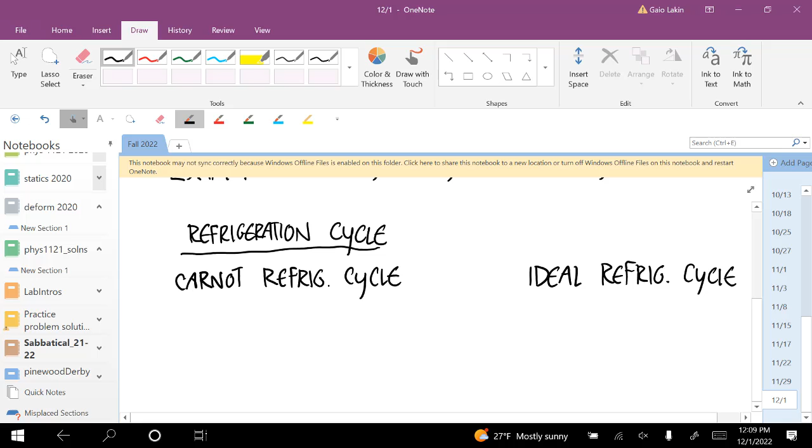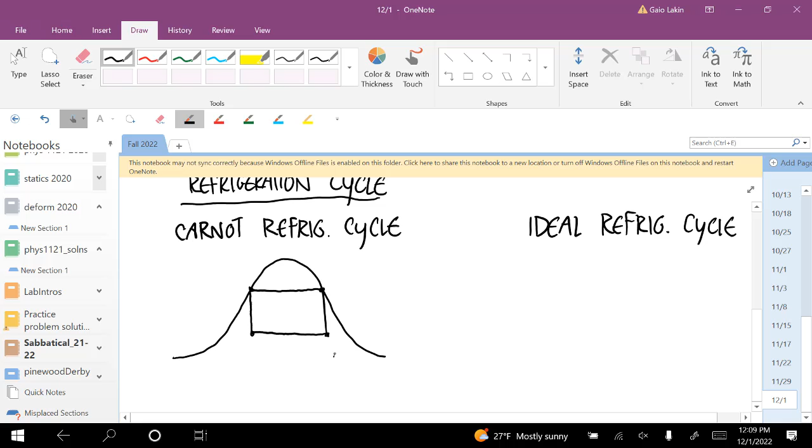So the last thing we're going to talk about is the refrigeration cycle. And we are going to talk about a Carnot refrigeration cycle briefly, and an ideal, what we'll call the ideal refrigeration cycle. The Carnot refrigeration cycle looks like this. Since a refrigeration cycle is an engine in reverse, the states go in the reverse order. So 1, 2, 3, 4, like that.

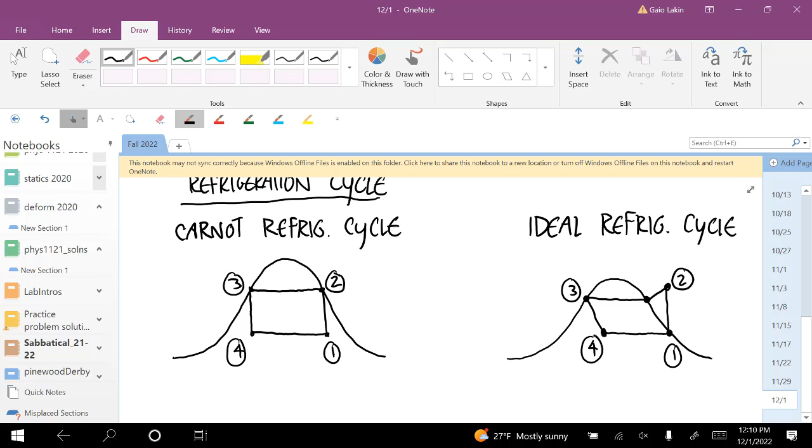And the ideal refrigeration cycle, I'll talk about why we have to make the changes from the Carnot cycle to this. So there's state 1, state 2, state 3, state 4. These are going around counterclockwise. Okay, so I'm going to start with the Carnot cycle.

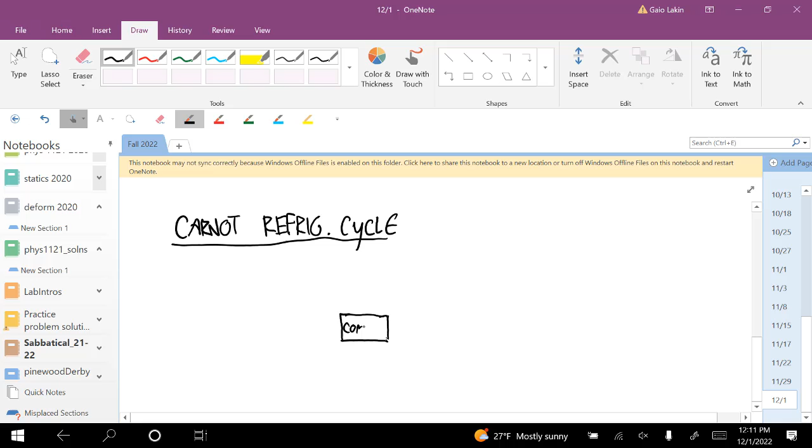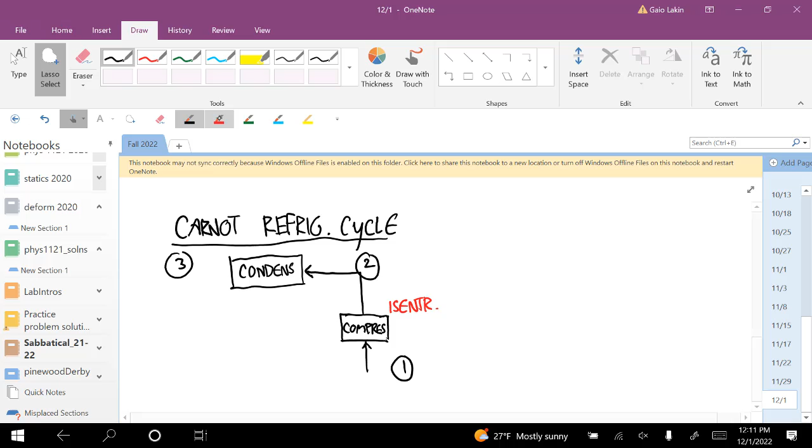And it looks like this. You have a compressor going from state 1 to state 2, and this is isentropic. Then you have a condenser going from state 2 to state 3, and that condenser is isobaric, just like it was for the Rankine power cycle.

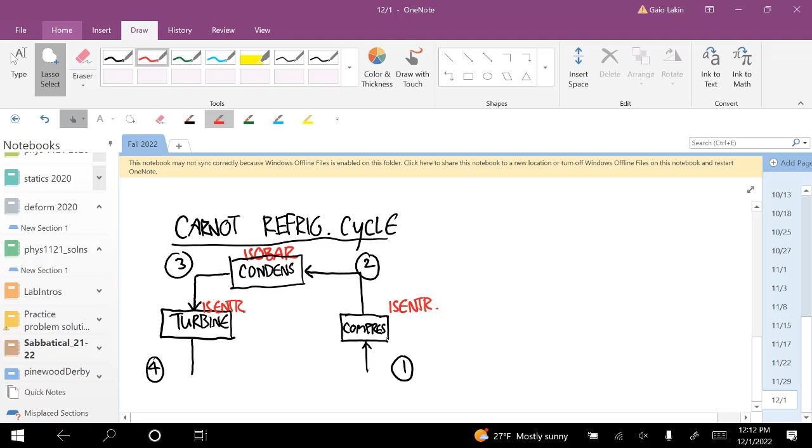And then you have an isentropic turbine going from state 3 to state 4. And then you have an evaporator going from state 4 to state 1, and this is isobaric.

Marshall! We missed you on Tuesday. We were just talking about how much we missed you. Good. Thank you. Oh, it sucked to miss class on Tuesday. I had to correct my sleep schedule from Thanksgiving weekend. Oh, yeah.

And so if you go 4, 3, 2, 1, you can see that this is an engine where that turbine provides work, and the compressor requires work. And let's, I guess, talk about what goes where with this.

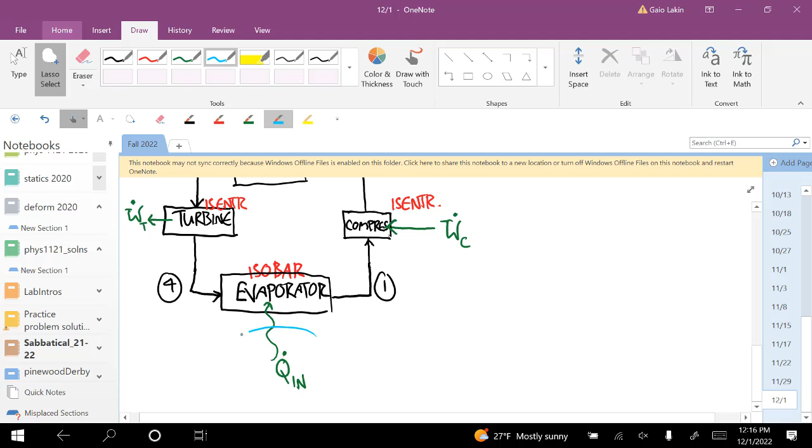In our case, we're doing it in order 1, 2, 3, 4, and it's providing refrigeration. So how does it work? I mentioned this just in passing once before, but all refrigeration cycles are based on this one idea: the Q in is coming from the reservoir. Let's call this the cold reservoir. The trick is, how do you get heat to come in from the cold place and go out at the hot place? That's the goal of a refrigeration cycle.

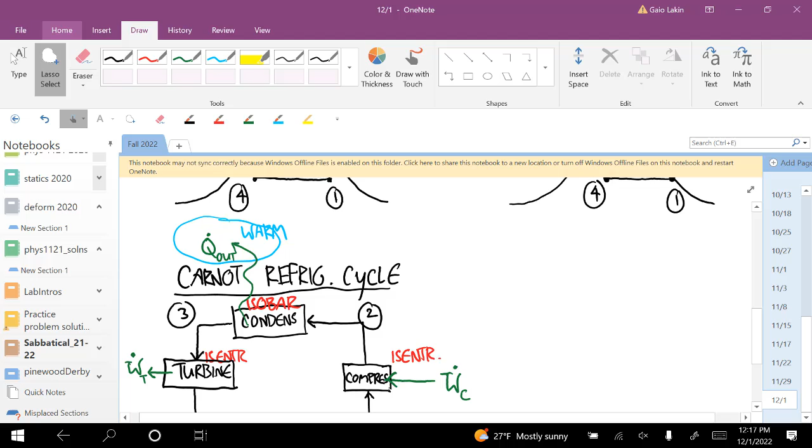This one up here is warm, that's just the surroundings. The trick to doing it is this compressor. You know that if you compress a gas adiabatically, there's no heat transfer. As you compress it, the temperature and pressure go up. So if your working fluid goes into this compressor, the temperature goes up. You compress it enough that the temperature is higher than the surroundings. Then you can get energy to be rejected through heat to the surroundings, and you've removed energy from your working fluid.

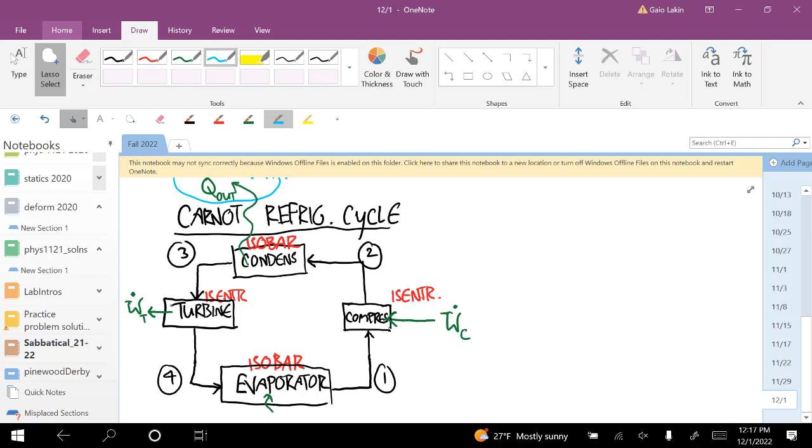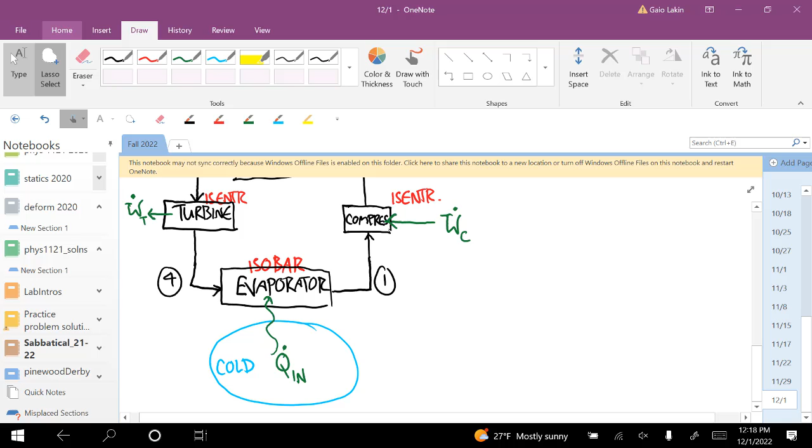Now you go back through the rest of the system, let the temperature and pressure go down again, enough that the temperature of the working fluid is now lower than the inside of the cold reservoir that you're trying to cool down. Now heat can transfer from the cold reservoir to your working fluid. So without adding energy to your working fluid, you can get heat transfer from the cold and drop that energy off at the hot. That's how a refrigeration cycle works.

One more thing about this. Did you know your refrigerator has a turbine in it to produce work? No, because it doesn't. But this is a Carnot cycle, so that turbine is in there conceptually — it's a Carnot engine if you go in reverse. We'll see that for practical reasons, you don't use a turbine, you just use a throttling device to change the temperature and pressure. That will be replaced when we go to the ideal cycle.

And on a temperature-entropy diagram, it looks like this. There's state 1, 2, 3, 4. So this is going in this direction now.

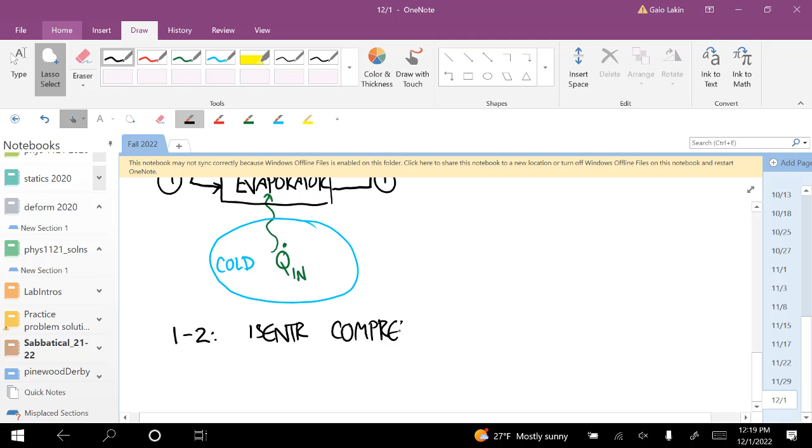Okay, so let's talk about the steps individually. State 1 to 2 is an isentropic compression. The reason we need this is to increase the temperature and pressure — not T over P, T and P. This requires work, W sub C, to go into the working fluid.

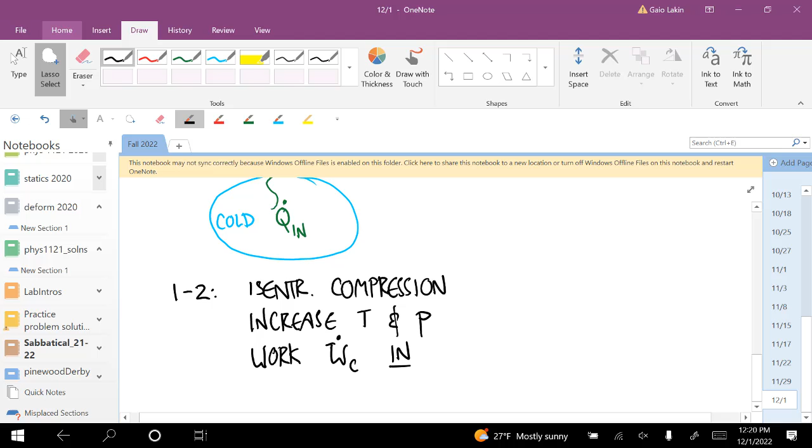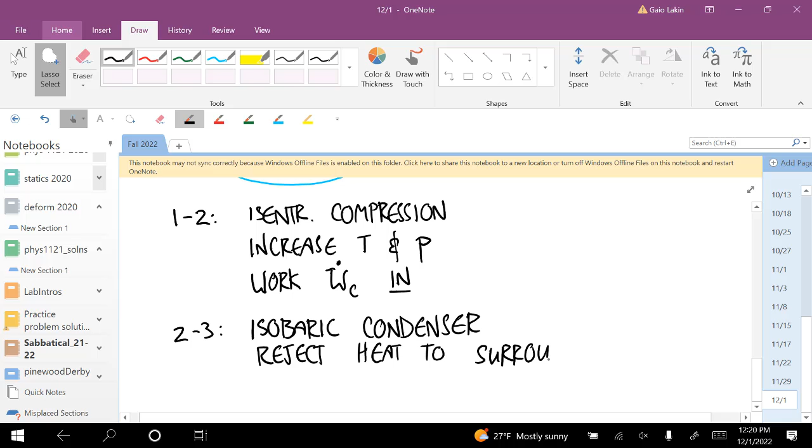Then from state 2 to 3, we have an isobaric condenser. The purpose of this is to reject heat to the surroundings, and that heat we're rejecting is Q out, Q dot out. A condenser is always giving away heat — that's how it goes from a vapor or a mix to a liquid.

And then state 3 to 4 is an isentropic turbine. This produces work, W dot sub T, and it also lowers the temperature, reduces the temperature and pressure.

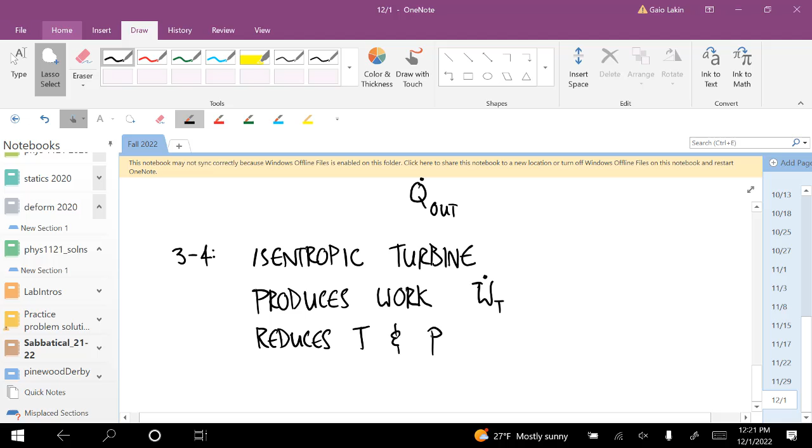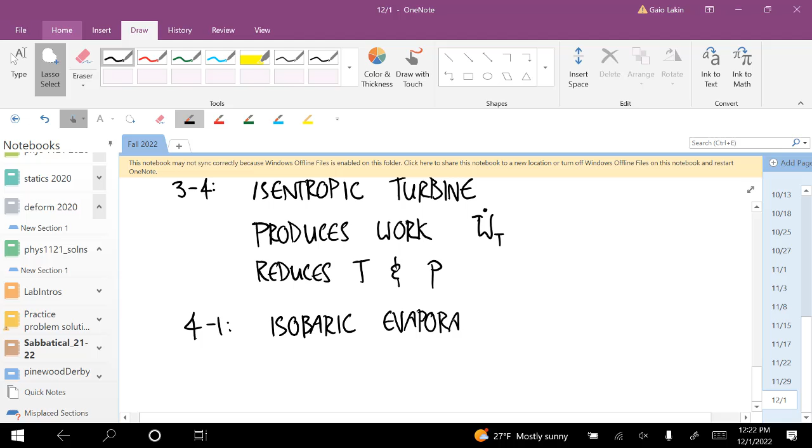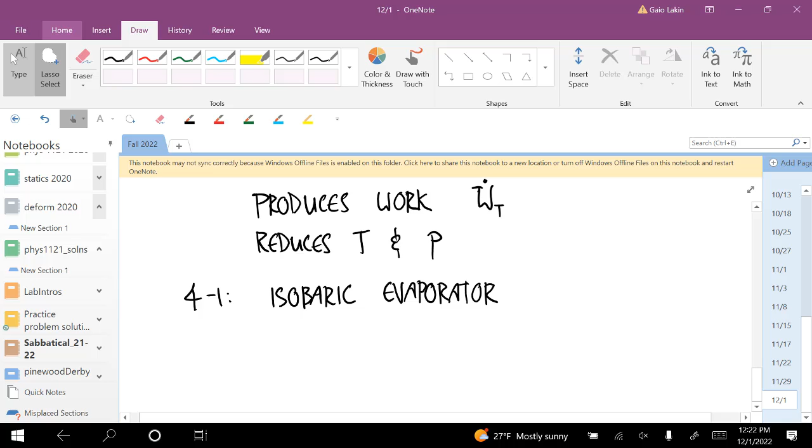And then the last process is 4 to 1, the isobaric evaporator. This takes the place of what was our boiler in a Rankine cycle. Any evaporator, in order to turn a liquid into a vapor, needs to bring heat into the working fluid. So that's what's happening here — heat comes in. So Q dot in, from the cold reservoir, or the cold region, let's call it — it's not a reservoir because you're trying to affect the temperature of that region.

Okay, how do you evaluate the performance of something like this? Well, this is a fully reversible cycle, so this is a maximum efficiency refrigeration cycle. The maximum performance would be defined as the heat that you bring into the system — that's what you're trying to accomplish, getting heat into the working fluid — divided by the net work done to make that happen. So this is Q dot in divided by W dot at the compressor minus W dot at the turbine. That's because the turbine is doing work for you. It would be cool if it was practical to have a turbine that generated a little energy as this all happened, but we'll talk about why that's not practical. And we can rewrite this.

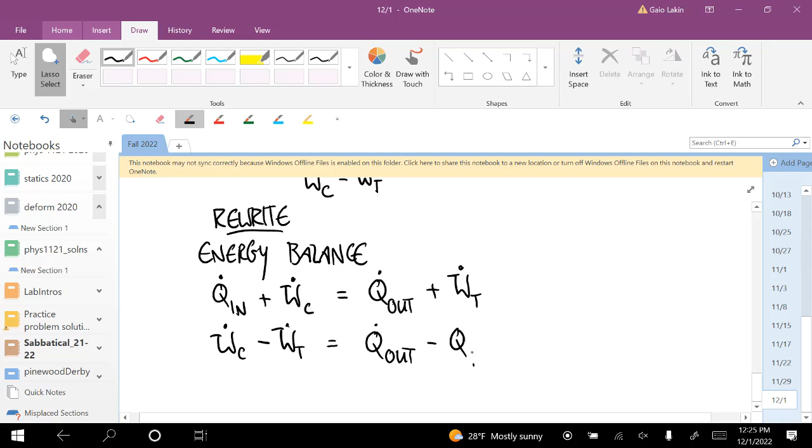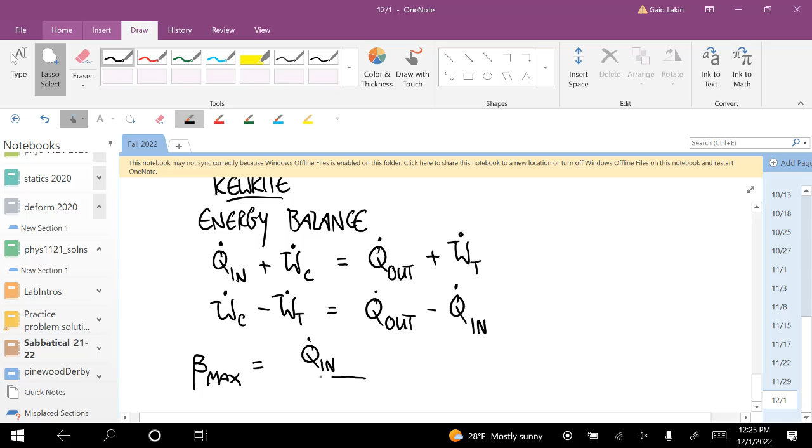And so now if we rearrange it, we can get the W dot C minus W dot T. That's the denominator in our expression for the maximum performance, and it's equal to Q dot out minus Q dot in. So you can rewrite the maximum performance just in terms of heats, and you get Q in dot divided by Q out dot minus Q in dot.

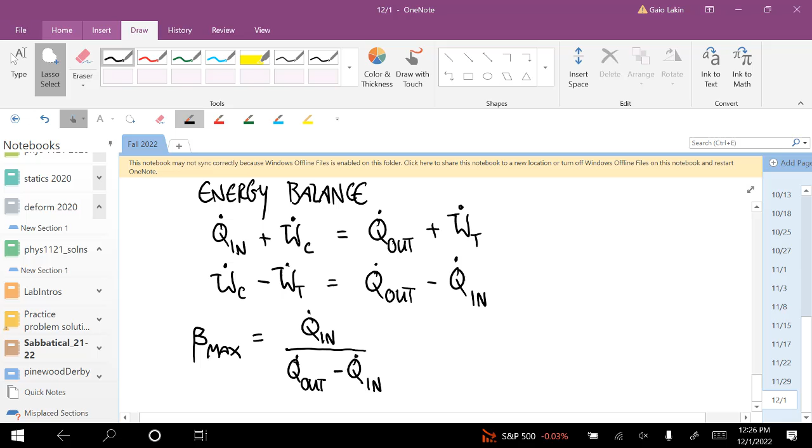Okay, so these are the maximum performance values. Do you remember when we did our short little thing about power and refrigeration and heat pump cycles earlier, how you calculated the maximum performance of a refrigeration cycle?

So we first did it in terms of heats like this, and then we said that for a reversible cycle, the ratios of those heats had to be the ratios of the temperatures. And so this came out to be the temperature of the cold reservoir divided by the temperature of the hot minus temperature of the cold.

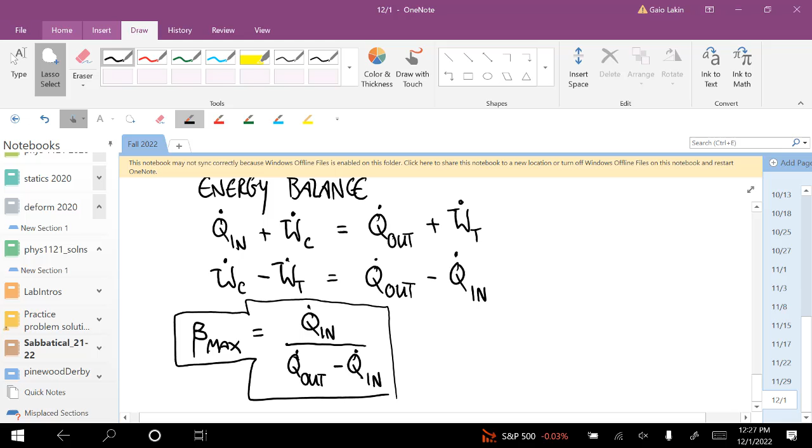Well, we can show that again now, in a way that makes more sense. How did we go from this to this maximum beta is equal to the temperature at the cold region divided by the temperature at the hot region minus temperature at the cold region? That was from long ago, we had that expression.

Well, for a reversible cycle, or this doesn't even have to be a cycle, it's for any reversible process, we know that d big S dt is equal to Q dot over T, over temperature, plus M dot at the inlet times the specific entropy at the inlet minus M dot at the exit times the specific entropy at the exit. If it wasn't reversible, we'd also have to add on an entropy production term. But for reversible, we know that we're not producing any entropy, so that goes away. We're assuming steady state, so this goes away.

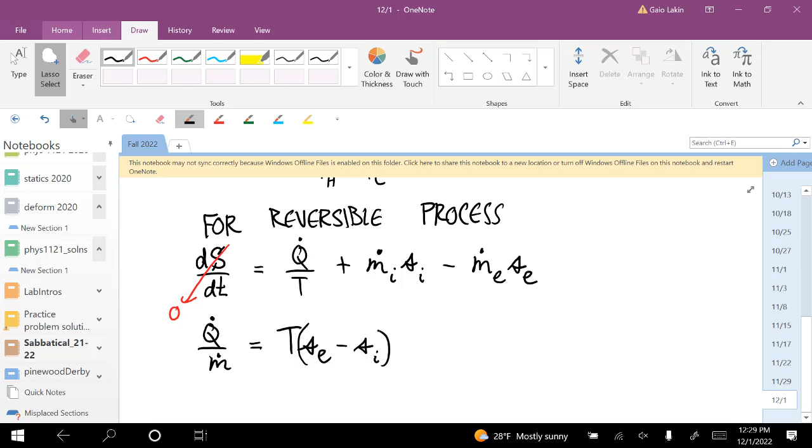So now let's think about what this says, since we're trying to figure out what's going on. All that we have in this heat expression for the maximum performance is what's happening where heat is coming in, that's at the evaporator, and where heat is going out, that's at the condenser. So I'm going to use this expression to evaluate relationships at the condenser and the evaporator. All I'm trying to figure out is how to get from this beta max in terms of heats to this beta max in terms of temperatures. We have this expression that has to hold for reversible processes that involves heats and temperatures. I'm going to evaluate that at all the places that are of interest to us, and then we'll see what falls out of it.

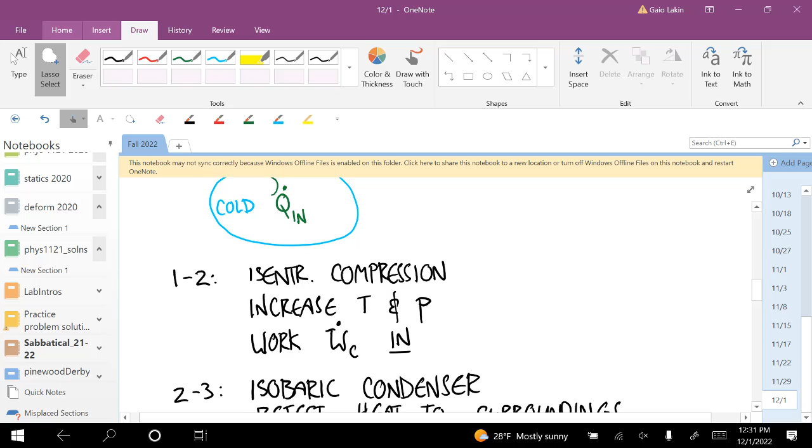Okay, so at the evaporator, heat is coming into the working fluid, right? That's what an evaporator has to do, you're going from a liquid to a vapor. And so that Q in has the same sign as this Q. And the evaporator is between states 4 and 1.

So this says at the evaporator that Q in dot over M dot is equal to the temperature at which region, the hot or the cold? Cold. It's counterintuitive, but that's what it is exactly. And so this is the temperature of the cold region times the quantity specific entropy at state 1 minus specific entropy at state 4. And now let's do the same thing at the condenser.

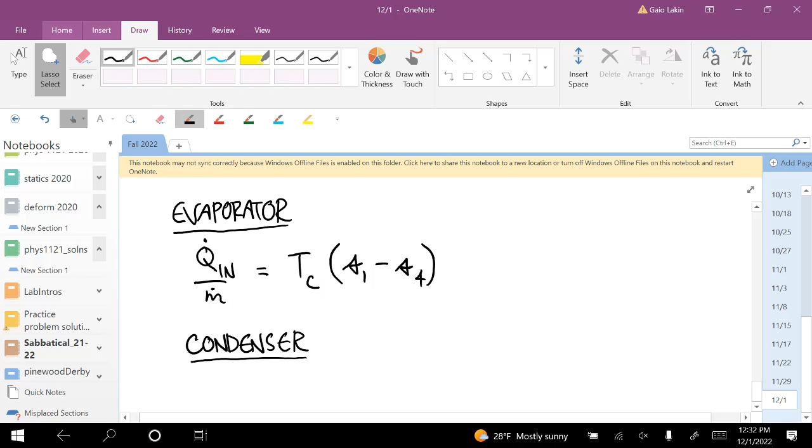Is the heat going into the working fluid or out of the working fluid at the condenser? Out. And so the sign of Q out is opposite what it would be from this entropy equation, right?

So we have negative Q dot out over M dot is equal to the temperature of, so is it the hot or the cold region at the condenser? Hot, yep.

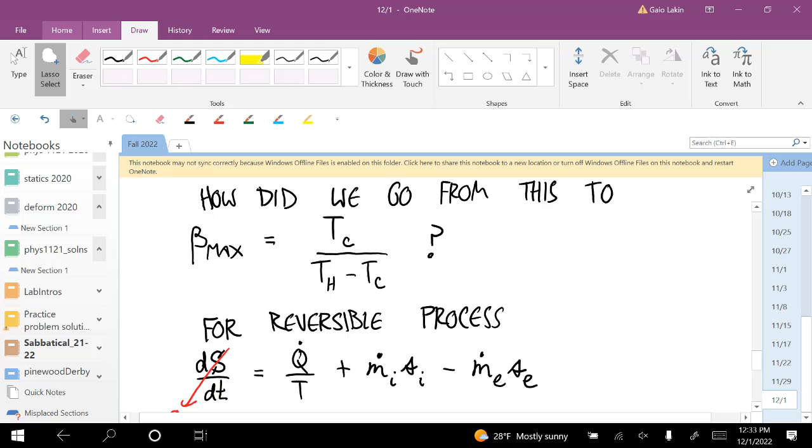And the inlet of the condenser is state 2, and the exit is state 3. So this is S3 minus S2. And then if I change the signs, you get Q dot out over M dot is equal to TH times the quantity S2 minus S3.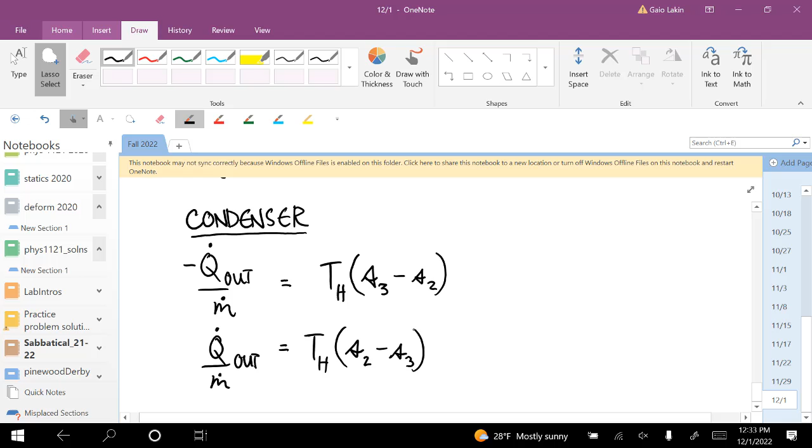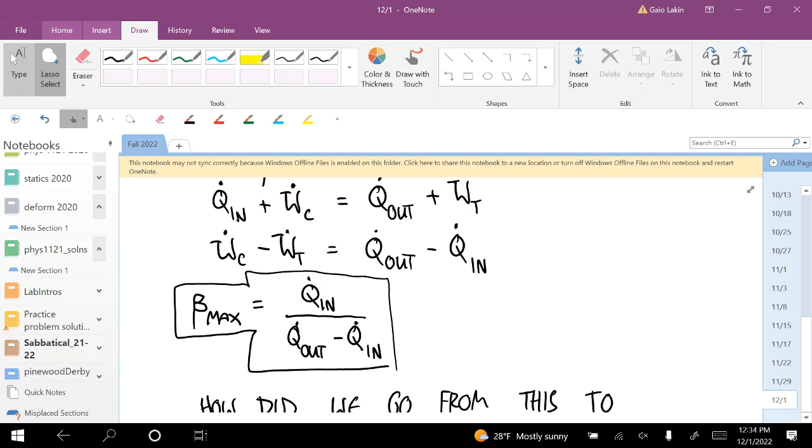And so now let's rewrite our expression for beta max with the Q's in it in terms of what it's all equal to. So we have Q in divided by Q out minus Q in. I'm going to write this as Q in dot, might as well divide everything by M dot since that's how the form we have it in.

Okay, now we can do the substitutions of what we just figured out. So we have in the numerator TC times the quantity S1 minus S4. And in the denominator, we have Q out, which is TH times the quantity S2 minus S3, minus Q in, which is TC times the quantity S1 minus S4.

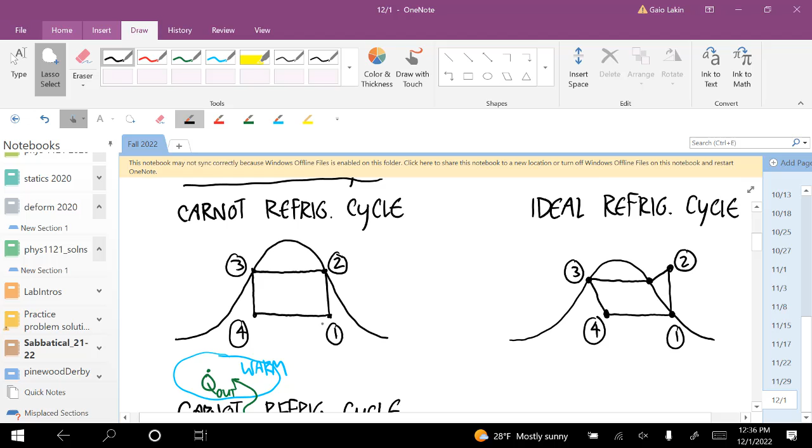Wait, so S1 minus S4 has to be equal to S2 minus S3? Yeah, that's right. And that's the case if you look at the temperature entropy diagram, you can see because of the two isentropic processes, 3 is equal to 4, 1 is equal to 2. So this is S1, this is S4, because those are isentropic processes.

And so the maximum performance is the temperature at the cold reservoir divided by the temperature at the hot minus temperature at the cold.

That's cool, right? Laura, right? Okay. Good. Me too.

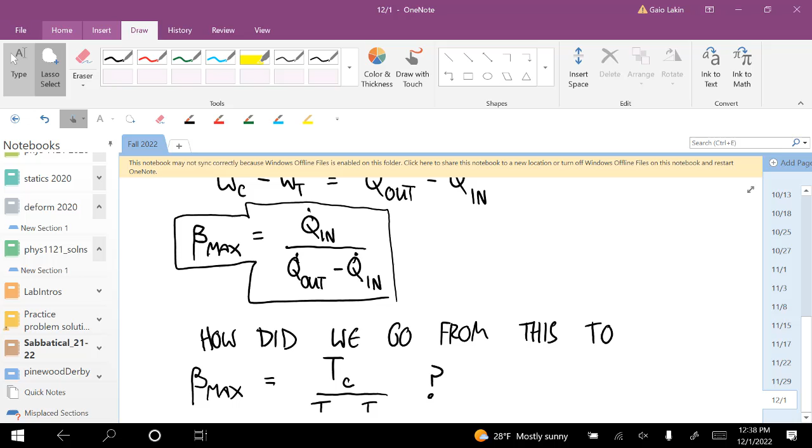We have this thing where, right, this is ideal so far. That other expression is for an actual one. Also, we're going to see that for a real refrigeration cycle, we're going to get rid of that turbine, and so then it'll come out to look the way we've seen it before. But we already have this expression that says the maximum performance is the way we saw it before.

Wait, so is there, you said there, well, I guess I should just let you finish instead of talking about the turbine. No, talk about it. So you said there isn't a turbine, or is there a turbine and the work just goes back into the system? The idea of the Carnot refrigeration cycle is there's a turbine and the work that it does goes back into the system. Okay.

But in a real refrigerator, you just use something else because turbines are hard to work with and you don't get much energy out of it anyways at these differences in temperature and pressure. Yep, yep.

So now that's everything we need to know about this Carnot refrigeration cycle. But let's think about some practical considerations.

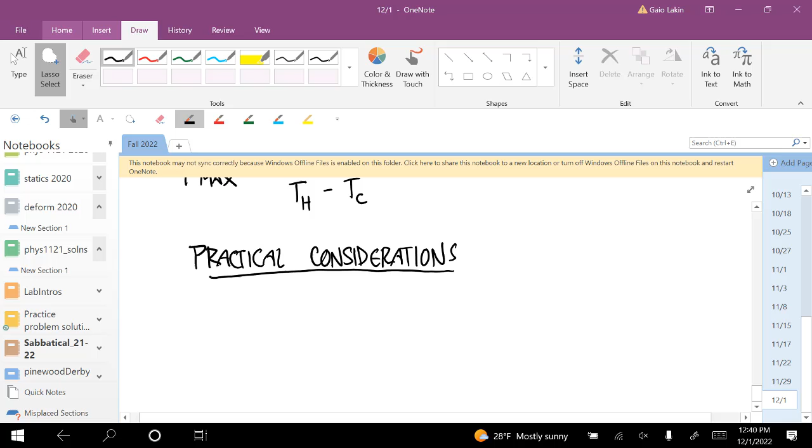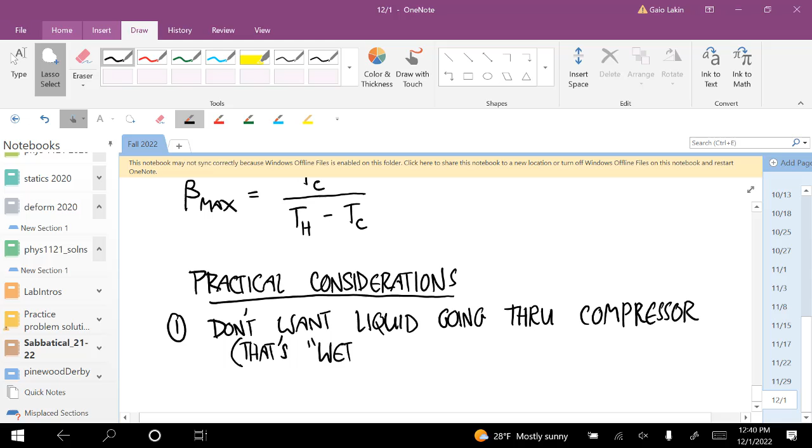The first one is having liquid in a mixture going through the compressor is bad for compressors. You don't want liquid going through the compressor. That's called wet compression. And it damages the compressor.

So if you look at the temperature entropy diagram, you can see that what we're probably going to want to do there is get state 1 all the way out here to where it's a saturated vapor. And then when you go through the compressor, you're turning it into a superheated vapor. Okay, so you don't have to deal with any liquid.

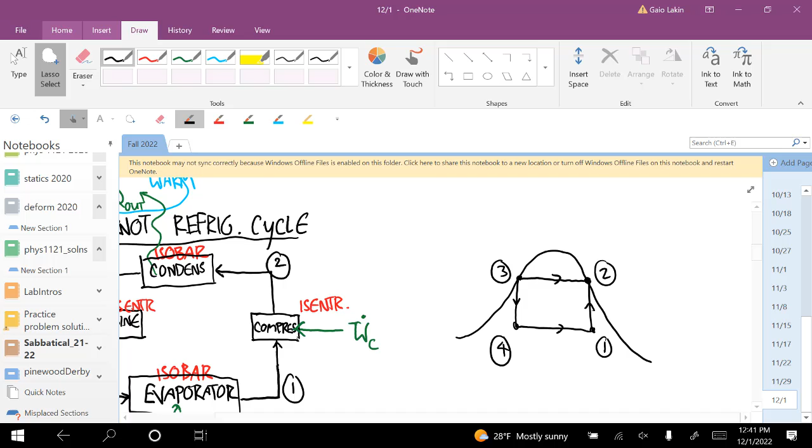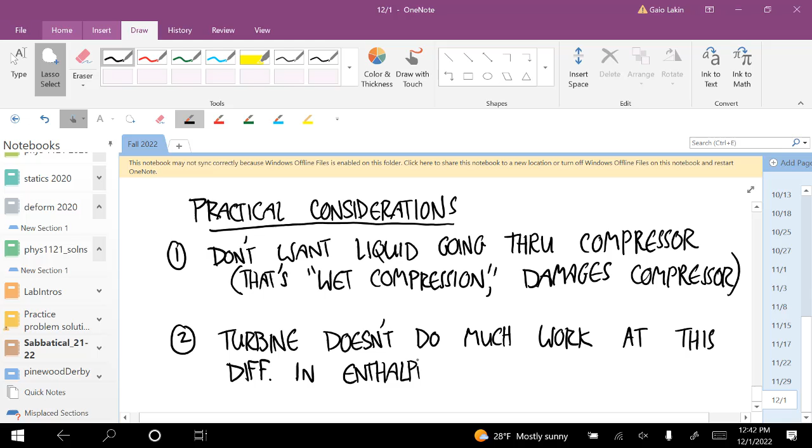And second, the turbine doesn't do much work at this difference in enthalpies that we have in a refrigerator. It's expensive to maintain and operate.

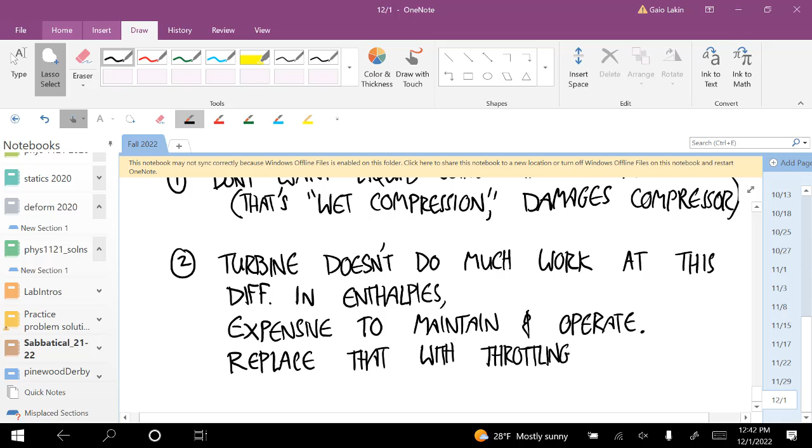We're just going to replace that with a throttling device. And what a throttling device does is change the temperature and pressure without changing the enthalpy. So H4 is now equal to H3.

And these two considerations give us the ideal refrigeration cycle, the one that we're going to be analyzing. It's not a Carnot cycle anymore. And it looks like this. Here's the temperature entropy diagram.

This is state 1, this is state 2. So now you can see that the compressor is acting on a vapor. This is state 3, and this is state 4. So that process from 3 to 4 is going through that throttling device. You can see that this time it's not isentropic. There's an increase in entropy, but the enthalpies stay the same.

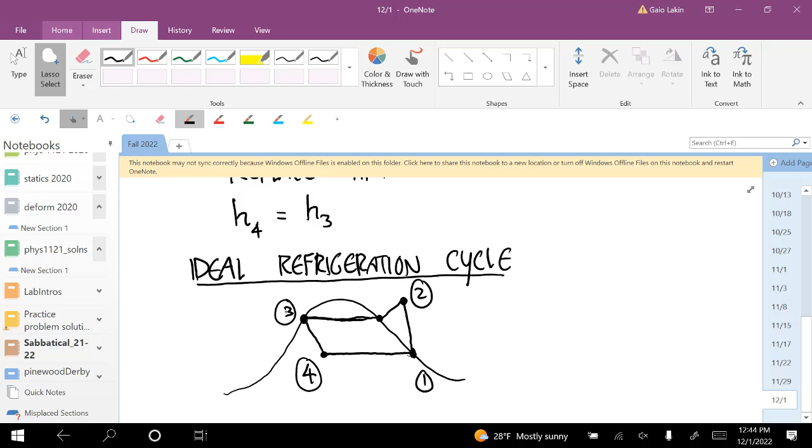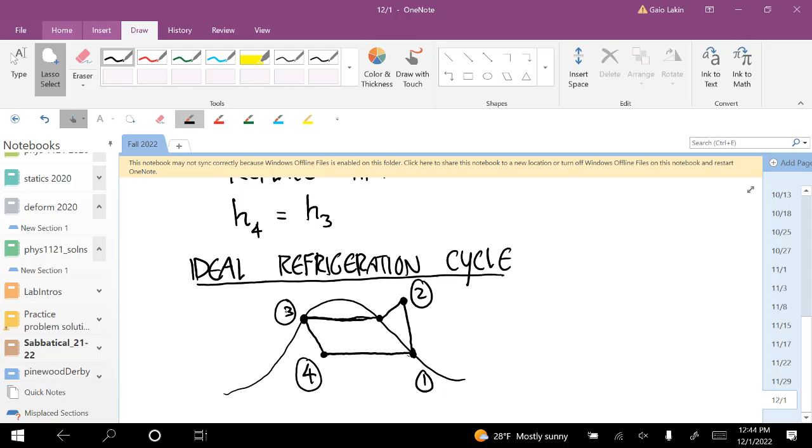Any questions about all this so far? So this is what we're going to be analyzing.

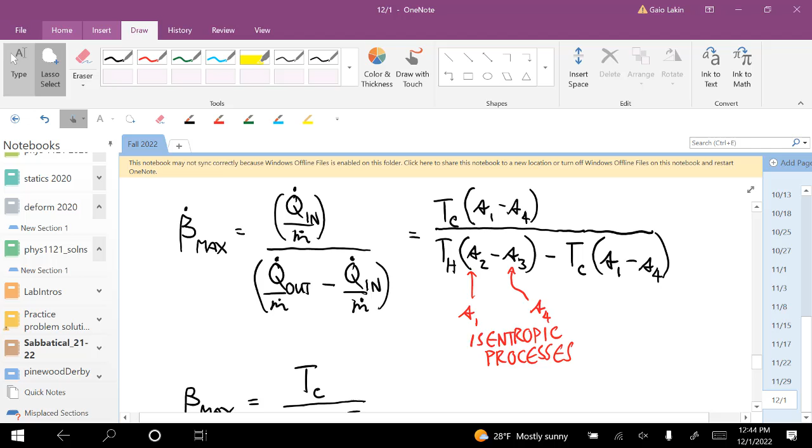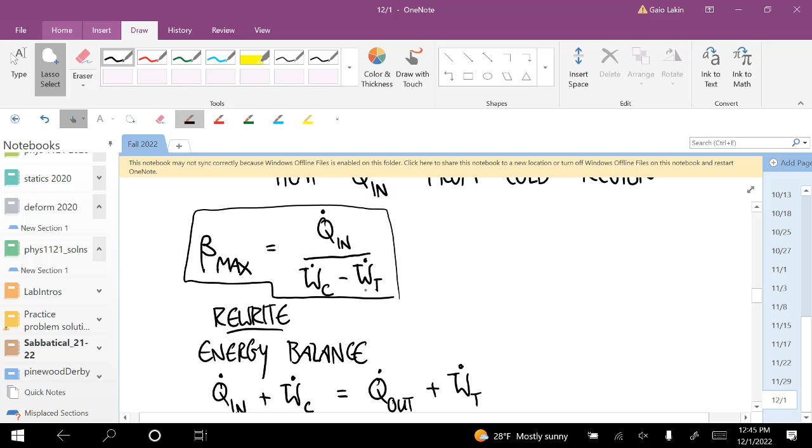And in this case, you can see if you go back to our original expression for beta, well, you can think of it this way: our true performance measure is going to be the rate of heat in divided by the net work that has to be done to make this happen. We're going to get rid of this term now, and it's just going to be the rate of heat in divided by the work done by the compressor, because there's no turbine anymore.

Yeah, you said the throttling device changes the enthalpy. It doesn't change the enthalpy, but it changes the temperature and pressure. Okay, got it.

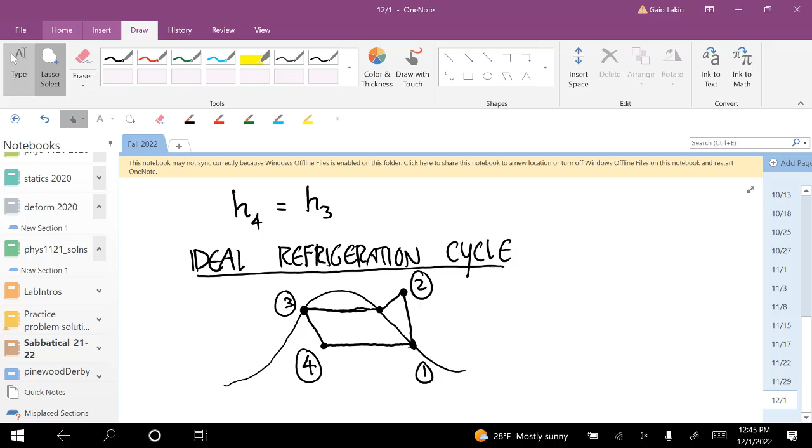Okay, so basically at this point, what I've done is just trying to motivate how we end up at this ideal refrigeration cycle. But now that the process is going to be almost the same as the Rankine power cycle, we're going to go process by process and figure out what the relationships are based on the control volume first law.

Okay? Yeah, this is pretty much like the Rankine power cycle, just reverse. Right, a couple of places it's different, well, at least in terms of the T-S diagram. Like in the Rankine power cycle, what is state 4 here is all the way over at the saturated liquid. Oh yeah, there's a few differences, but conceptually the overall approach is the same, yes.

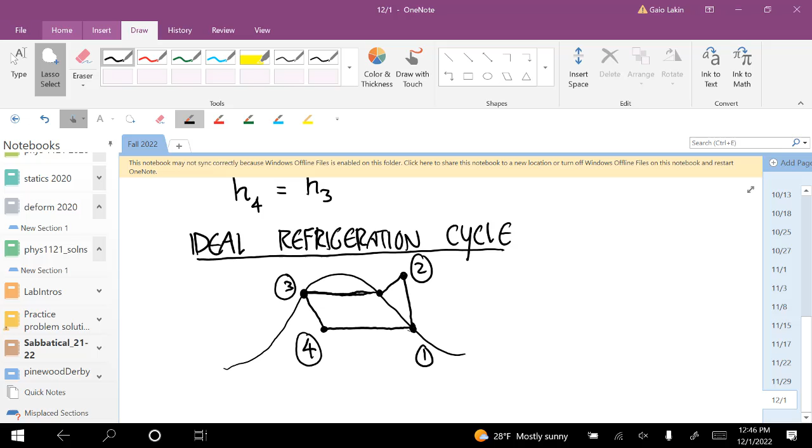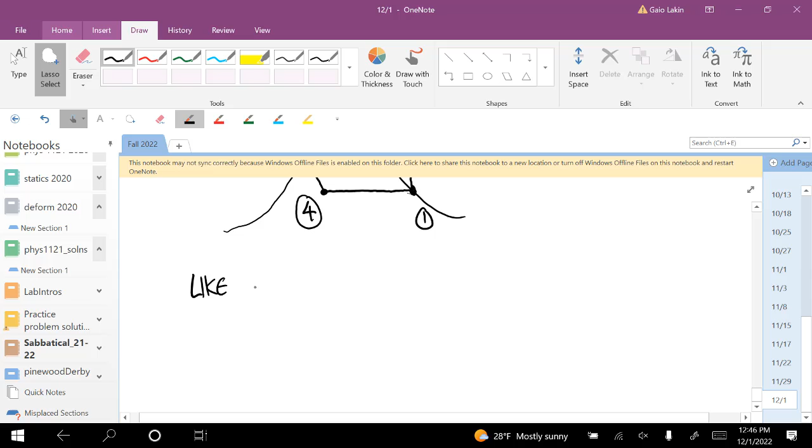Okay, so now just like the Rankine power cycle, we want to find expressions for the work of the compressor, the heat out, the work of the turbine, and the heat in.

No, that's a good question. What are we calling it? I think I do call it a turbine through my notes, but let's call it T for throttle.

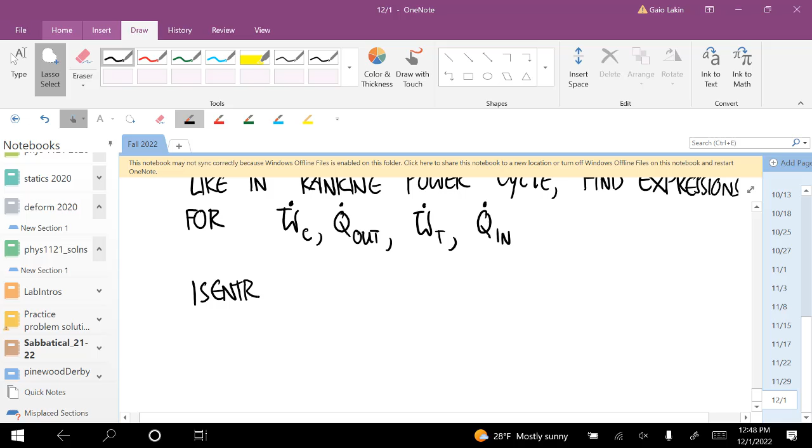Okay, so let's start with the isentropic compressor. The control volume first law says dE/dt is equal to Q dot minus W dot plus M dot times the quantity. I'm going to get rid of everything right now except the enthalpies. So we have the enthalpy at the inlet, which is state 1, minus enthalpy at the exit, which is state 2.

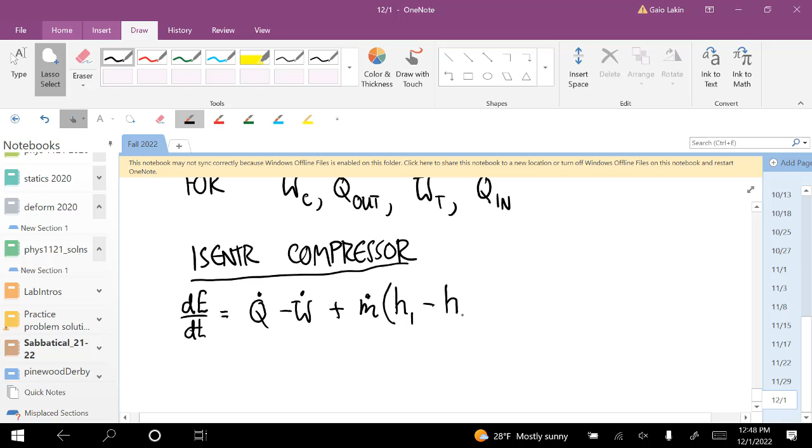There's no heat transfer. It's steady state. The compressor does work on the working fluid. So this says 0 is equal to, we have to change the sign of that work. So this is W dot positive of the compressor plus M dot times the quantity H1 minus H2.

Yeah, because the first line is using the sign convention of the first law. So that's saying if work is being done by the working fluid, then it would be positive. But our working fluid in the compressor is having work done on it. And so WC has the opposite sign of W.

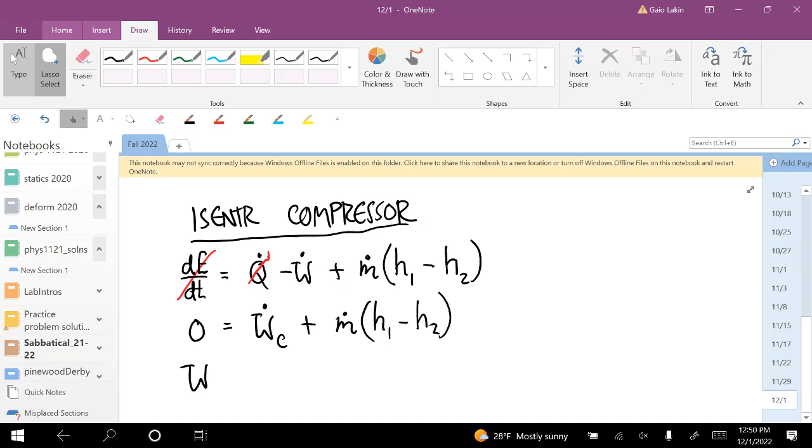Okay, so for the Rankine cycle and for this, there are always two processes where you have to switch the sign of the Q or W, and two processes where it stays the same. So W dot C over M dot is equal to H2 minus H1.

And then for the condenser, this is isobaric. Start out again with the control volume equation. At the condenser, is heat going into the working fluid or leaving the working fluid? Leaving, and that's the opposite sign of what this Q is assuming. So we have 0 is equal to negative Q dot for the condenser plus M dot times the quantity H.

For the condenser, this is state 2 to state 3. Q dot for the condenser over M dot is equal to H2 minus H3. Yeah, thank you.

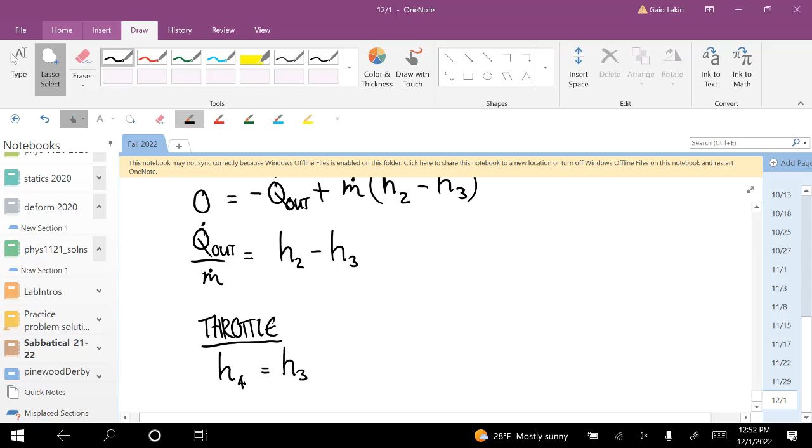Then for the throttle, that one's easy, we already were given that one. H4 is just equal to H3. And the last process is going through the evaporator. This is isobaric.

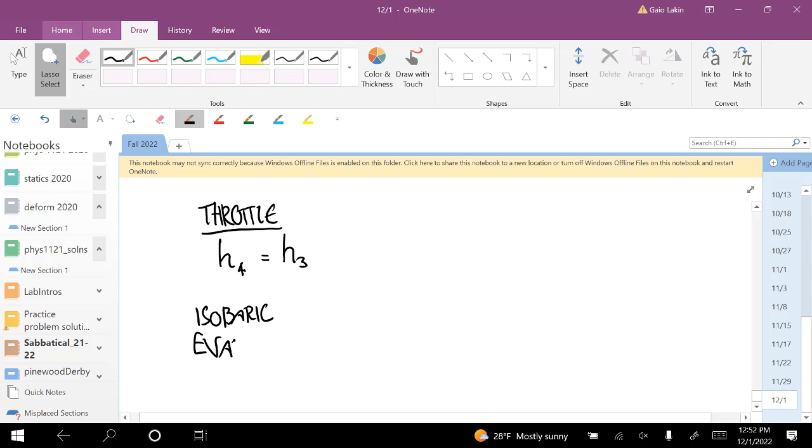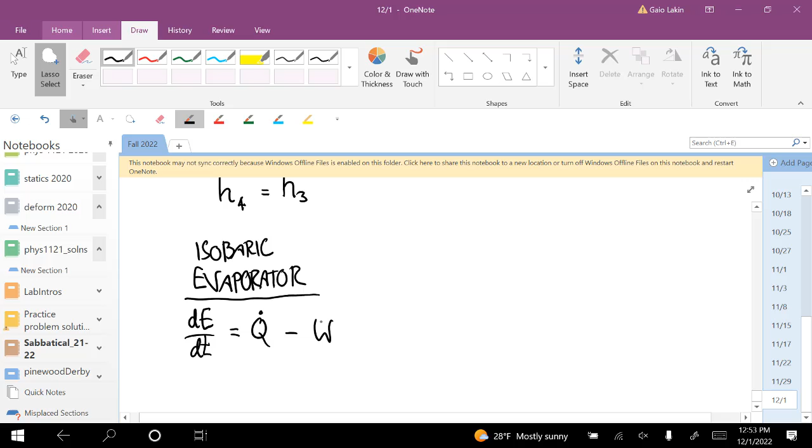dE/dt is equal to Q dot minus W dot plus M dot times the quantity H_I minus H_E.

There's no work done, so dE/dt is 0 because it's steady state. At the evaporator, heat is coming into the working fluid, so that has the same sign as this Q dot. So this is Q dot in plus M dot. For the evaporator, the inlet is state 4, the exit is state 1.

And now that we have expressions for all this stuff, we can calculate the same kind of things that we did for the Rankine cycle.

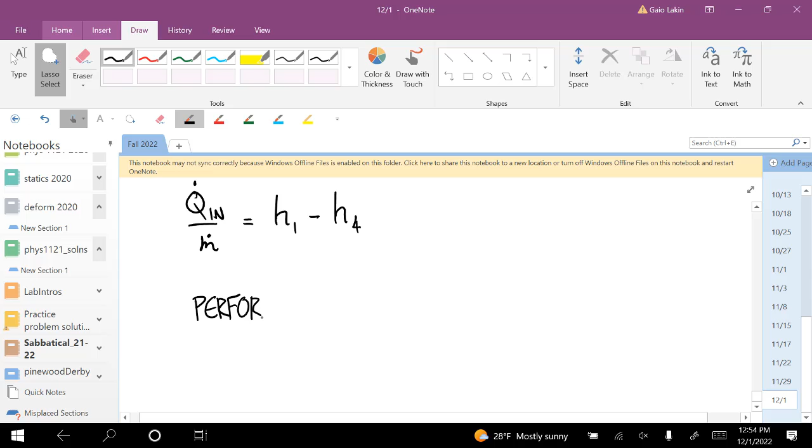Let's calculate the performance measure. So beta is equal to Q in dot over W for the compressor dot. And we can divide both of those by M dot to get it into the form that we've seen. So this is equal to Q in dot over M dot divided by WC dot over M dot. And now we can just go back up to the things we just calculated. And this is equal to H1 minus H4 divided by the quantity H2 minus H1.

Could you explain the throttle? You know, I cannot really explain that. All I know, I couldn't derive anything related to it, but that's just a simplified form of what a throttling device does. The temperature and pressure change, but the enthalpy stays the same. That's about as much as I can say about it. Yes, exactly, and somehow the internal energy due to the temperature reduces at the same rate that the volume times the pressure increases. I don't know why that is, but that apparently is what happens.

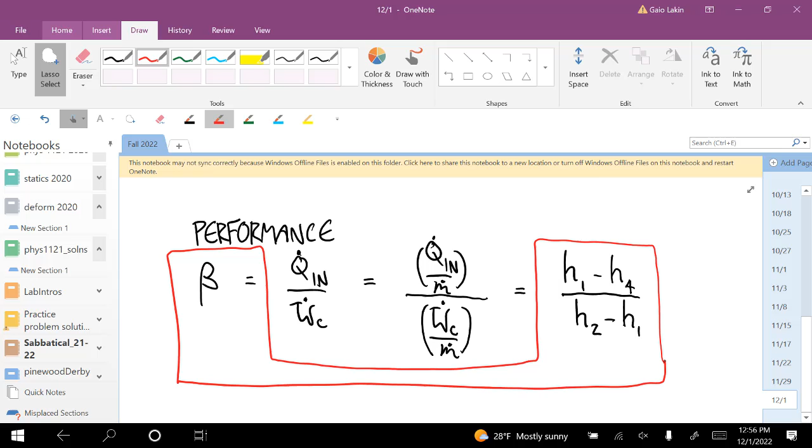I'm not going to give you any problems with this, so I'm not going to go through a full example problem, but I have this one, let me write it out so you can see what kind of problems could be asked. It'll look very much like the Rankine power cycle problems. I'll lay out how I would go through it, but I'm not going to go through the whole thing because it would take a long time.

So, let's say that the refrigerant we're using is refrigerant 134A. That's one that you have stuff for in your tables. That's the working fluid.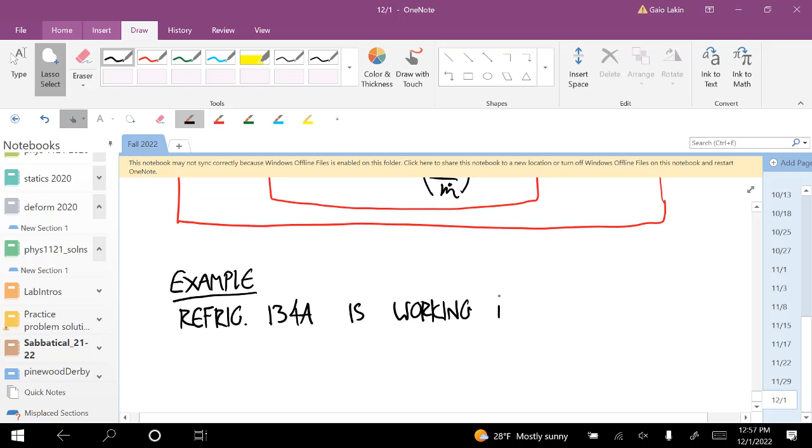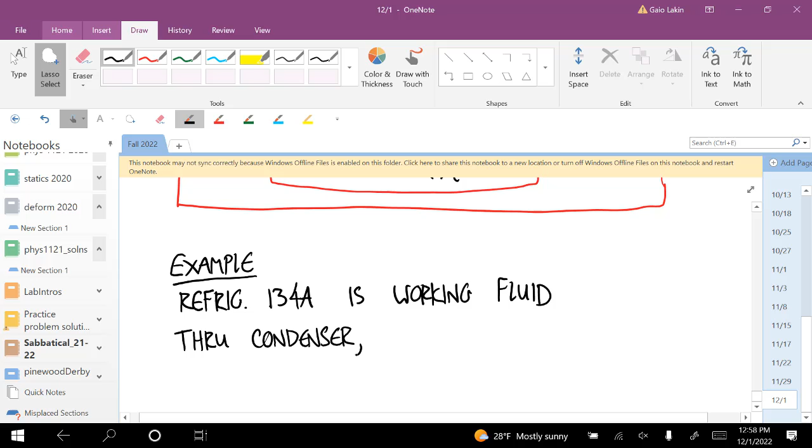Through the condenser, the temperature is 0 degrees Celsius. So this, I said through, but this should be at the exit of the condenser. And then at the exit of the evaporator, the temperature is 26 degrees Celsius.

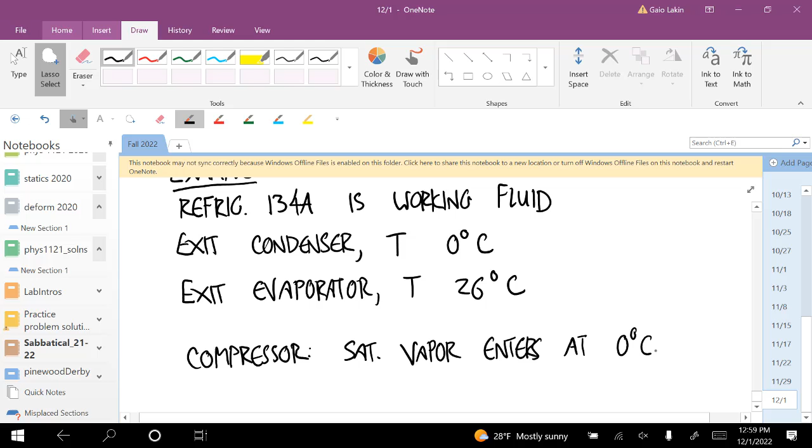At the compressor, saturated vapor enters at 0 degrees Celsius. And at the condenser, saturated liquid exits at 26 degrees Celsius.

Condenser, saturated liquid. Yes. No, it exits. It exits the condenser. I just have these switched, I'm sorry. So the evaporator is the cold one and the condenser is the hot one. So it exits the condenser.

It exits the evaporator at 0 degrees Celsius, and it exits the condenser at 26 degrees Celsius. Now it all matches, right? Yeah.

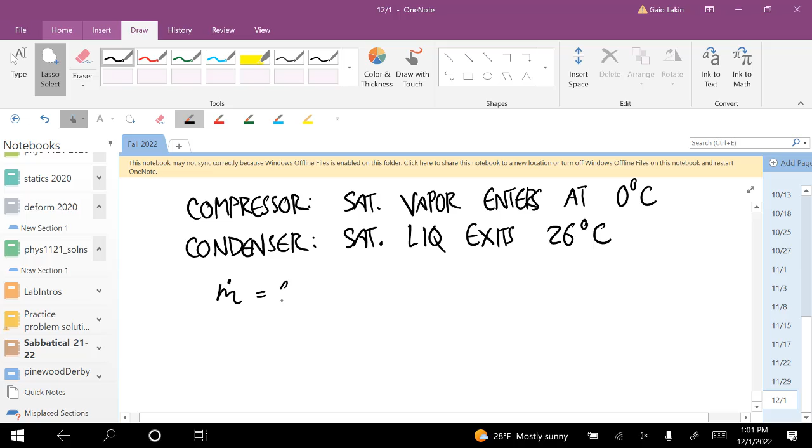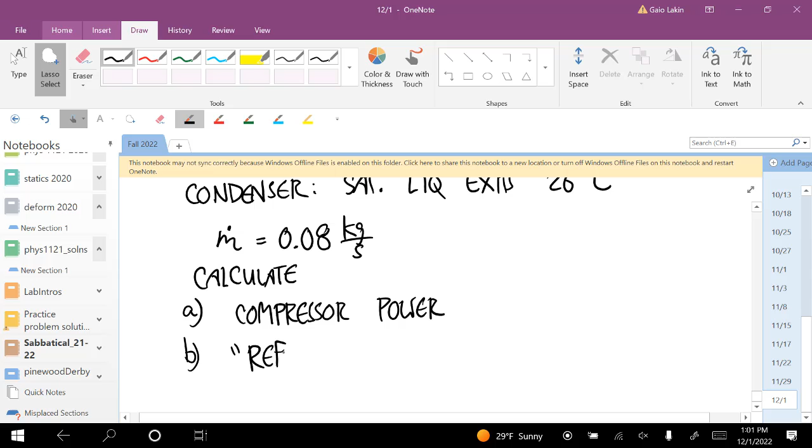The mass flow rate is 0.08 kilograms per second. And we want to calculate the compressor power, what's called the refrigeration capacity, which is Q dot in, the coefficient of performance, and then finally the maximum possible coefficient of performance.

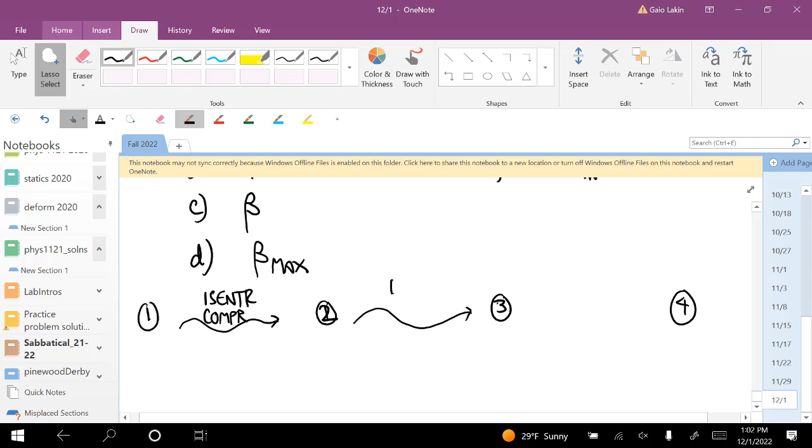I would go about this the same way that I would go about the problems for the Rankine power cycle. I'd write out states like this. This process from 1 to 2 is an isentropic compression. From 2 to 3 is an isobaric condenser. From 3 to 4 is the throttling device. From 4 back to 1 is an isobaric evaporator.

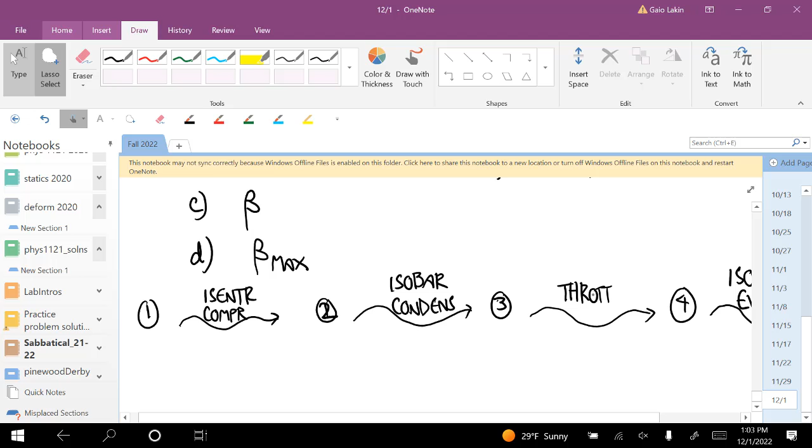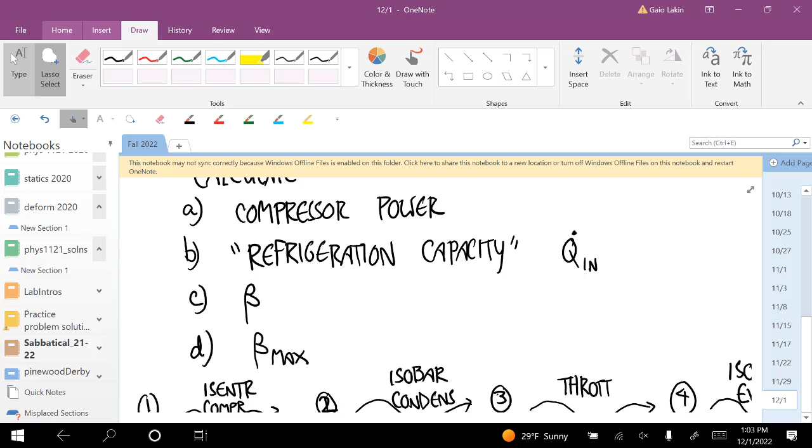And then I would just start to fill out what we know about the different things. At state 1, that's entering the compressor, so we know that that is a saturated vapor at 0 degrees Celsius. From that, you can look up H1 and S1. Then since this process is isentropic, S1 is equal to S2.

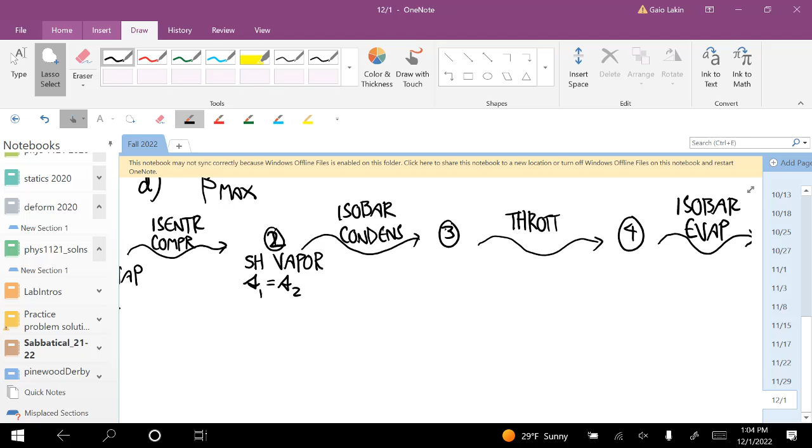State 2, we know, is a superheated vapor. State 3 is a saturated liquid, and it's a saturated liquid at 26 degrees. And so we can use that to look up the pressure. Now, since 2 to 3 is an isobaric process, P2 is equal to P3. And go on and on like that.

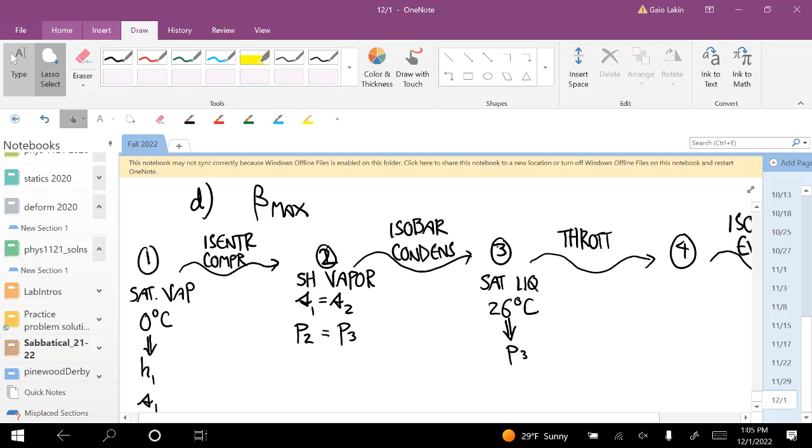It's the same process that we would follow for a Rankine cycle at this point, but we're just trying to get all of the same thing. You want all the enthalpies at the different states. Any questions about that?